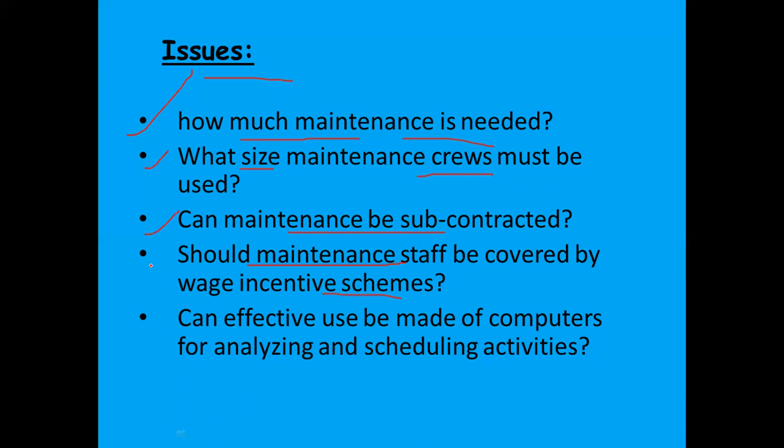Now, what is the meaning of preventive maintenance? In the earlier class we discussed that prevention is better than cure. In the same regard, preventive maintenance is undertaken before the need arises.

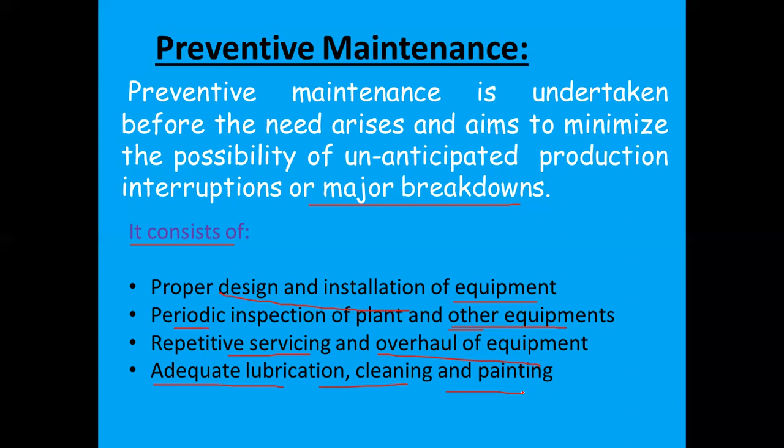Next, what are the benefits or advantages of this preventive maintenance?

The first one is greater safety. Whenever you are cleaning properly, or whenever you are using proper preventive maintenance, automatically safety is done in a proper way.

Next, decreased production downtime. The production time lead times can be decreased whenever you are maintaining this preventive maintenance.

Next, fewer large scale and repetitive repairs. The repetitive repairs and other things will be reduced by using this preventive maintenance.

Next, less cost for simple repairs. Whenever you are going for preventive maintenance properly and constantly, the cost also will reduce for some simple repairs.

Next benefit is less standby equipment required. Standby means waiting for the other run or waiting for other use. So the standby equipment also can be reduced.

Next, better spare parts control. For the machinery or equipment, whenever you are going for proper maintenance, the control of spare parts will be increased and the quality and efficiency will also increase.

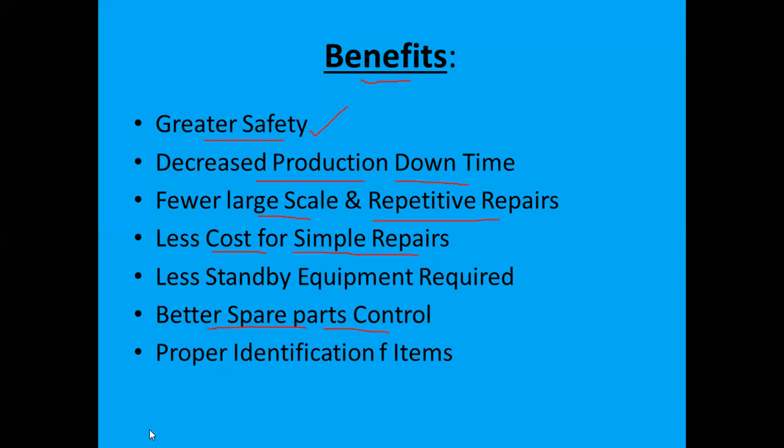Next, proper identification of items. By giving proper maintenance to any equipment or machinery, the items can be identified very easily and quickly. So these are the benefits that happen whenever you are using the preventive maintenance concept.

Next, the preventive maintenance goal. The main goal of preventive maintenance is to reduce the incidence of breakdowns or failures in the plant or equipment, in order to avoid extra cost.

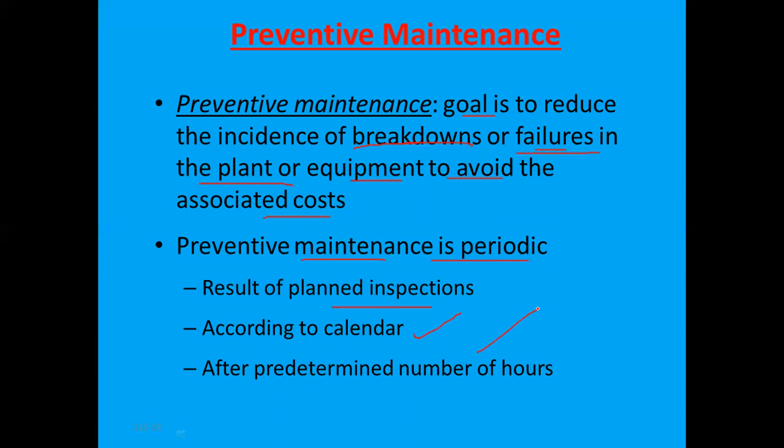Next, preventive maintenance is periodic. Periodic means time to time, the result of planned inspections. So we get the benefits like the results of planned inspections, according to the calendar, periodically, after a predetermined number of hours. These are the things to be maintained whenever you are using preventive maintenance as a periodic system.

Next, to ensure effective implementation of activities, it is very important that production facilities need to be maintained in good working condition, in order to ensure the effective implementation of activities.

And the cost is also reduced whenever you are going periodically, for machinery breakdown etc. We can assure the quality, meaning we can give the guarantee for the quality. Therefore, maintenance management is an important aspect of any organization.

So what is the conclusion? It says that in every firm, whether it is a processing firm, a servicing firm, a fabrication firm, or any type of firm, the main aspect is we have to go for proper maintenance of anything.

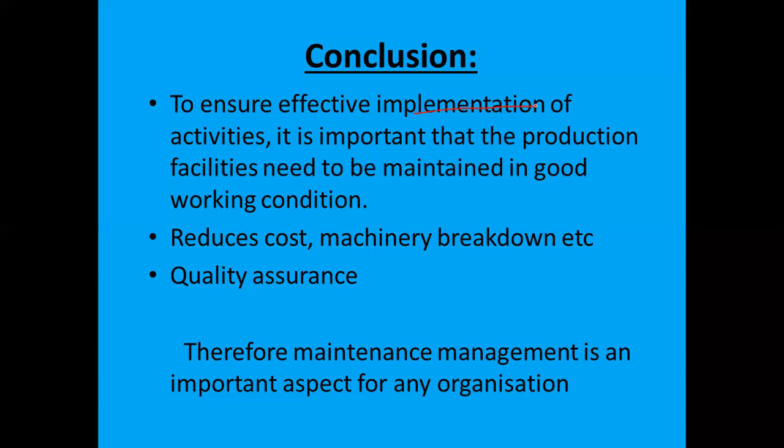Next, some of the problems related to preventive maintenance we'll see now. See here, the frequency of breakdown. For example, the number of breakdowns: 0, 1, 2 and 3.

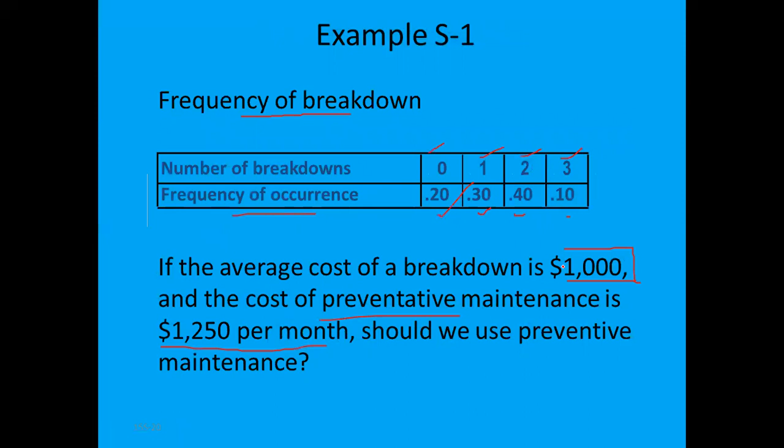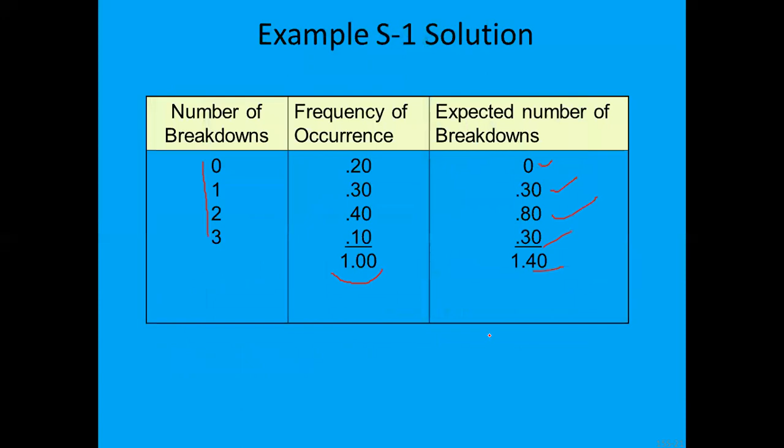So the total expected number of breakdowns is 1.40. Now the expected cost to repair - the cost to get repaired is 1.4 here. So we are having 1.4 breakdowns per month. That is 1.4 breakdowns per month into $1,000, that is $1,400.

Now the preventive maintenance is 1250 rupees, $1250. Therefore the preventive maintenance results in savings of 150 per month. So 1400 minus 1250, we can save $150 per month if we are going for preventive maintenance every month. If we are not going for preventive maintenance every month, we are getting the charge of 1400 rupees, $1400.

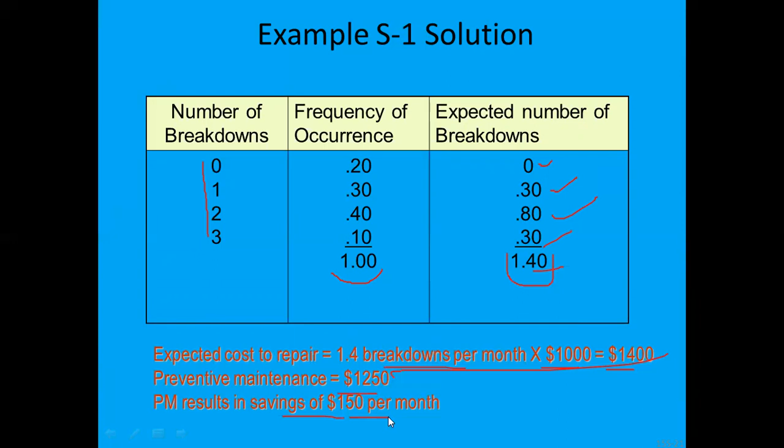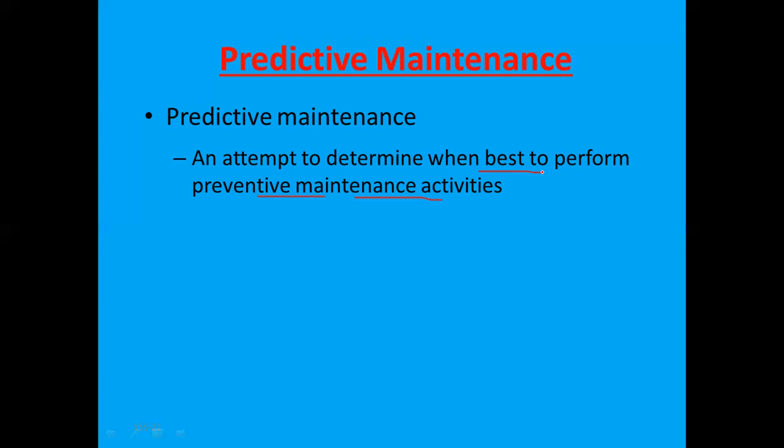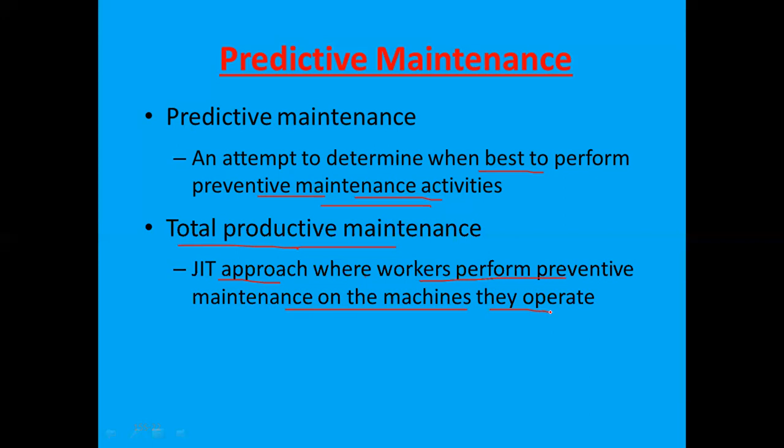Next one is predictive maintenance - an attempt to determine when best to perform preventive maintenance activities. Next, the total productive maintenance is the JIT approach, where the workers perform preventive maintenance on the machines they operate. That is total productive maintenance.

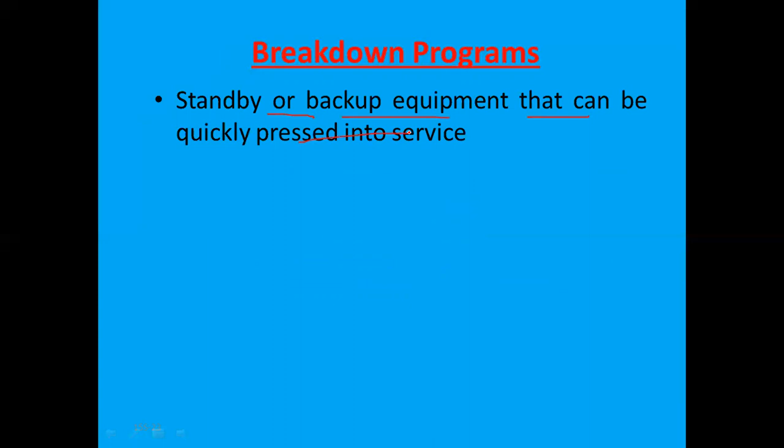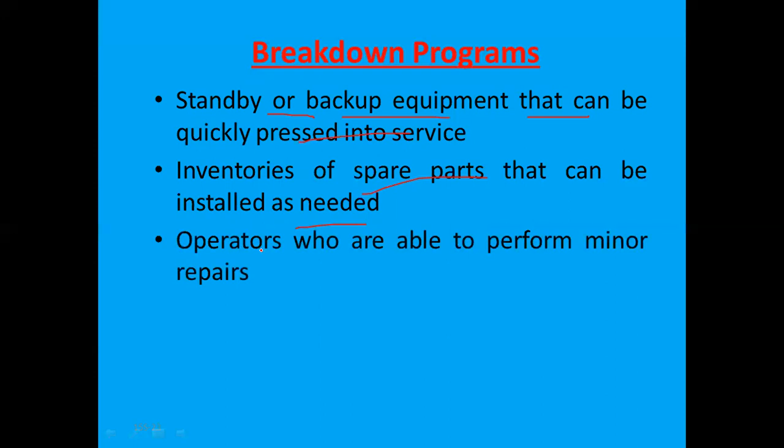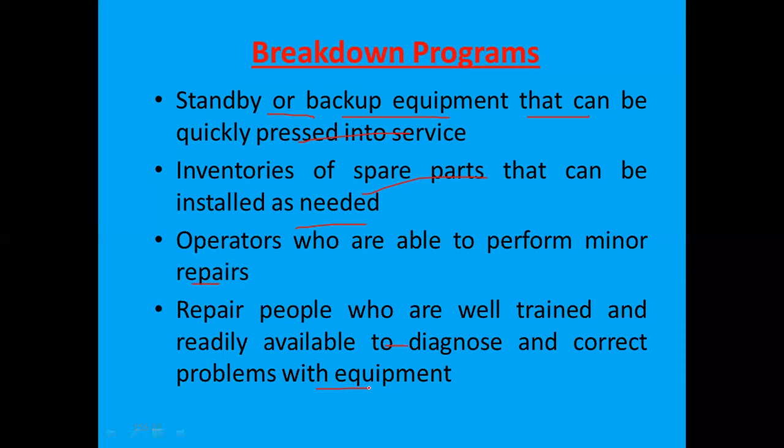Next, what are the breakdown programs? The breakdown programs such as standby or backup equipment that can be quickly pressed into service. Next, inventories of spare parts that can be installed as needed - as per the requirements, we have to take the spare parts and install them when they are in the inventory stock. Next, operators who are able to perform minor repairs - under the breakdown programs, the operators who can perform minor repairs also can be done here. Next, repair people who are well trained and readily available to diagnose and correct problems with equipment - so in the breakdown programs, the people who are ready and know the repairs are well trained and available readily to diagnose, meaning to detect and give the correct solution for the problem.

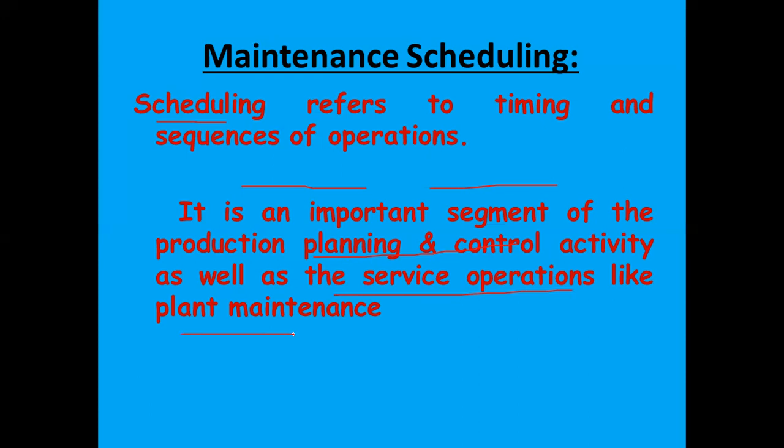So that is nothing but the scheduling process. Scheduling is an important segment of production planning and control - it is an important segment of PPC activity as well as the service operations like plant maintenance. Next, what are the importance of the scheduling process?

First, it facilitates optimum use of highly paid maintenance staff. Facilitates means it gives or services optimum use, meaning balanced use of highly paid maintenance staff. It optimizes the highly paid maintenance staff.

Next point, equipments can be utilized effectively. The equipments can be used effectively for the scheduling process.

The third point is it eliminates undue interruptions. So whatever the problems, interruptions, discomfort or any cuttings are there, it eliminates them in the production flow.

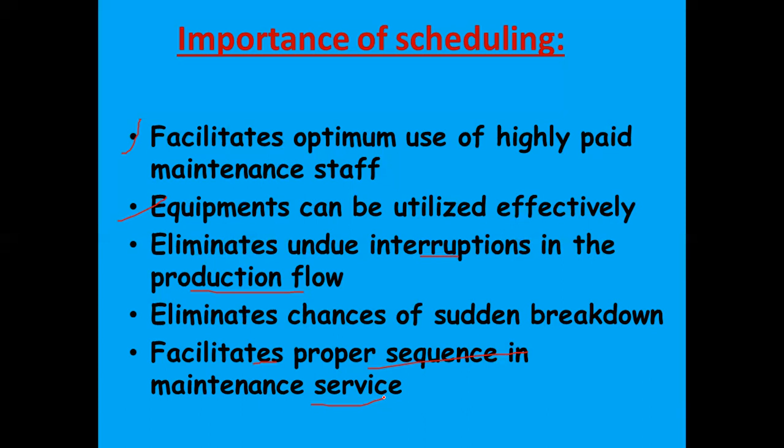Next point, pollution control in process industries. With this we can simply assume what happens in the industries when the pollution rises.

Pollution is an environmental hazard. You can see pollution everywhere outside - on the roads, inside the house, in commercial complexes, from vehicles, pollutions from the industries, from petrol bunks, from any type of sector, whatever it is. So environmental pollution accompanies each stage of industrial processes.

What does it do? The environmental pollution accompanies means it comes along with each stage of industrial process, starting with the raw material process and fuel production, and ending with the waste treatment. So environmental pollution accompanies each stage of any industrial process, starting from raw material concept and fuel production and ending with the waste treatment.

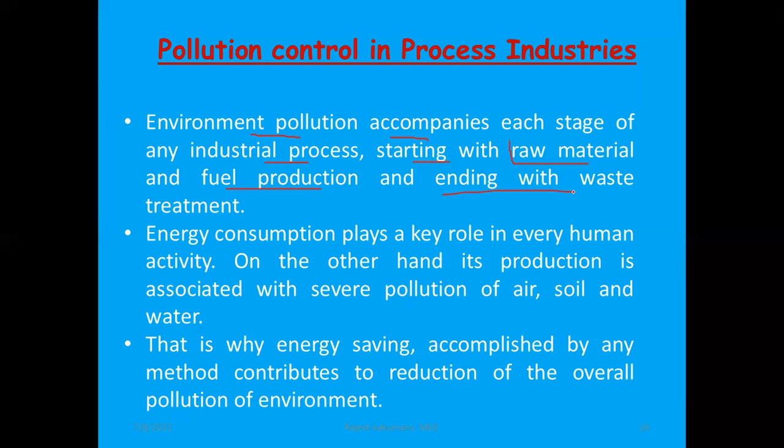Next, the exhaustion of raw materials. Exhaustion means taking away or removal, going away, closing. The exhaustion of raw materials in nature means everything for processing of any item - it may be iron material, rubber material, glass material, or whatever the material. Whenever the raw materials are exhausted, meaning completely over in nature, what happens?

There will be increasing emission of greenhouse gases, GHG, and the depletion of the ozone layer. There will be a problem in the ozone layer, and severe pollution of underground water and soil prompted modern society to abandon the old fashioned approach of end of pipe emissions control. So the exhaustion of raw materials in nature - whenever the raw materials are exhausted in nature, there will be a problem of greenhouse gas effect.

At the same time, there is a depletion of the ozone layer and severe pollution of underground water and soil.

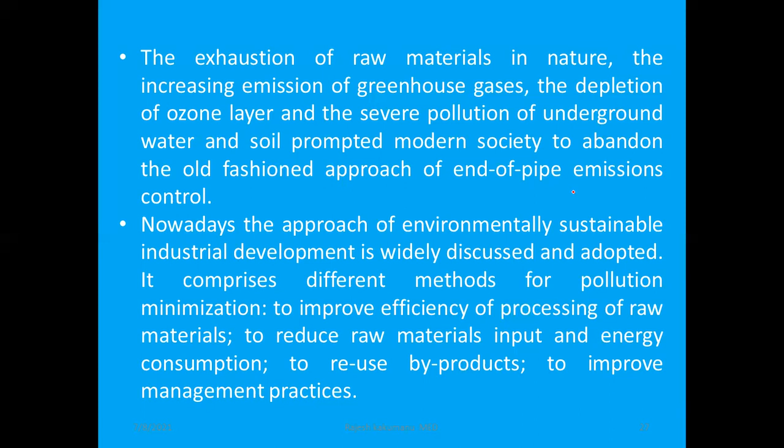Next, this sustainable approach is demonstrated using the examples of chemical industries.

All these things are related to management concepts, and whenever we have to show it in a real time example, we have to take all these management practices into the real time process.

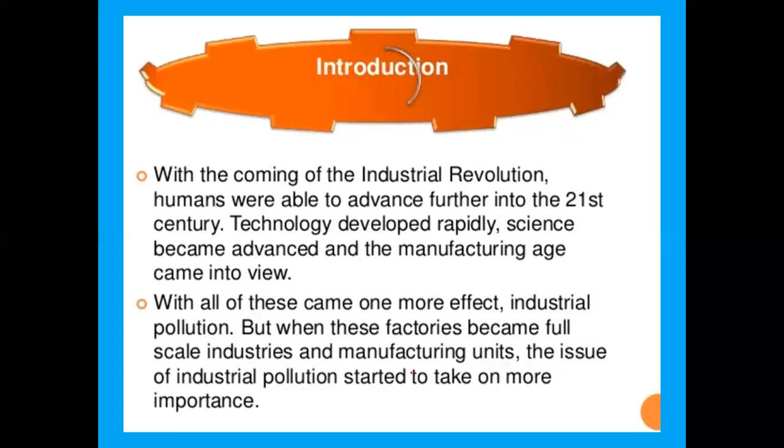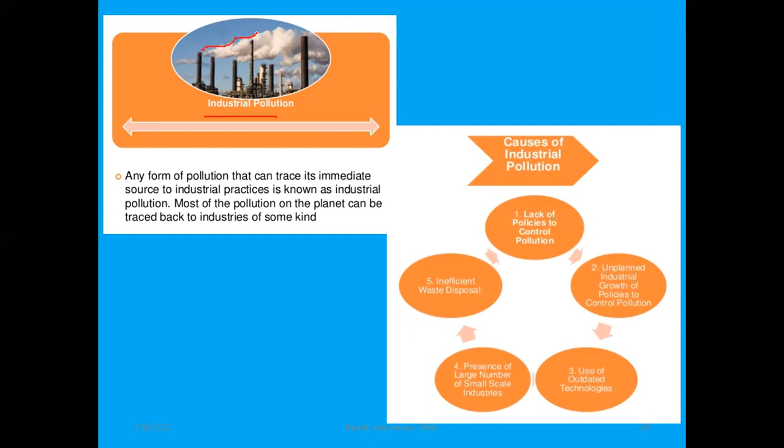Okay, next, see here, take the example of some industries where the pollution is mixing in the sky as clouds.

Any form of pollution that can trace its immediate source to industrial practices is known as industrial pollution. It may be solid form, liquid form, or gaseous form - any form of pollution which has an immediate source of industrial practices.